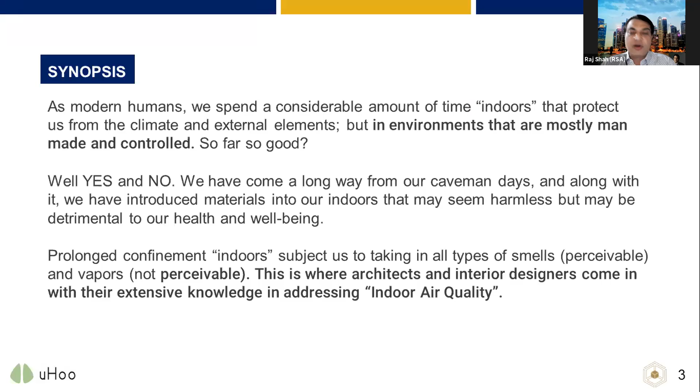So our prolonged confinement indoors subjects us to things like smells. So smells, I would put it as perceivable. And vapors are the non-perceivable. We can't really smell them. And so this is where architects and interior designers come in with their extensive knowledge. We are still learning and trying to address the indoor air quality question.

Okay, just a simple, just to start it off, definitions. I won't go into detail. What is an indoor? What is air? What is quality? What is design? I'll just move on.

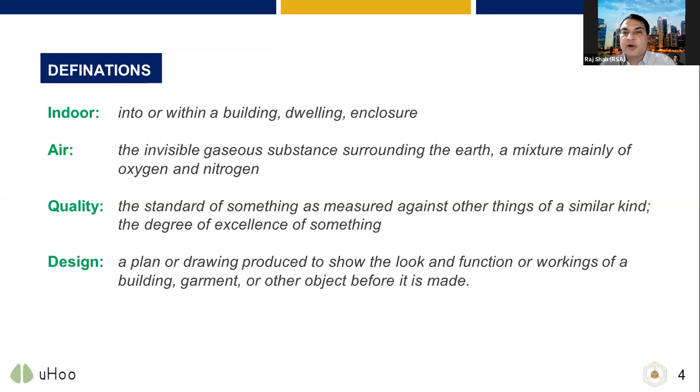Okay, this is all information that you can easily find if you Google, right? But these are what we deal with, day in, day out. Common indoor air pollutants are asbestos, which is already barred and forbidden in most interior spaces. There are a lot of old buildings that still have that, and it has to be really handled with extreme care, and only experts can touch it or remove it.

Biological pollutants, carbon monoxide, formaldehyde, and this is one of the key contributors to deteriorating indoor air quality, because formaldehyde is in a lot of materials that you wouldn't expect it to be in. All right, and it's also been industry-wide forbidden now or not allowed, especially for products that are rated green. But they are still present in certain products if you are unaware.

Lead, of course, that's another element that we used to use a lot in metals, but not now. Nitrogen dioxide, pesticides, radon, that's again with all the equipment that we are starting to use, and we don't realize that all of this is there.

Now, if you look at the picture on the right, the air quality at work, it's a little bit small, but it's not meant for us to read everything. In an indoor environment, all these things—from gray to blue to green to yellow—affect us in different ways.

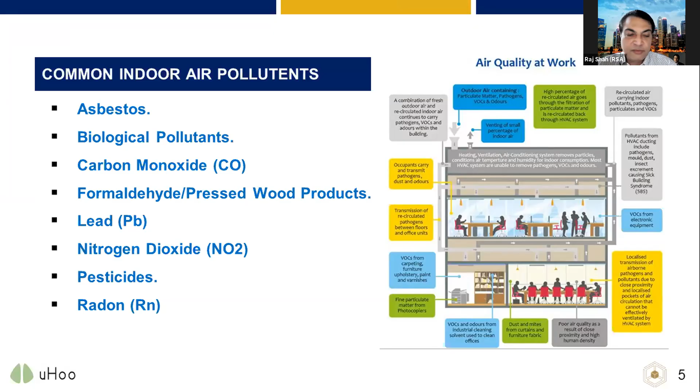But they're all contributing factors to the quality of air in any indoor environment. And I think the poll said it very clearly: allow natural air in, fresh air, better exchange. Some of these things we can control, but if you're in a commercial building, unless the building management or the building is designed to help trap these things ahead of time, there's not much else you can do. Good news is, we will be introducing certain new technology that will help you get ahead of the curve, for whatever you cannot control.

Okay, so two images. One is all the things poor indoor air quality affects—your health. I just mentioned headache, fatigue, eye and nose irritation. All these could be symptoms of a flu or a fever, but more likely, if you are staying too long in an indoor situation, you will experience these, and they could be a direct or indirect cause and effect of materials used indoors or the air quality indoors.

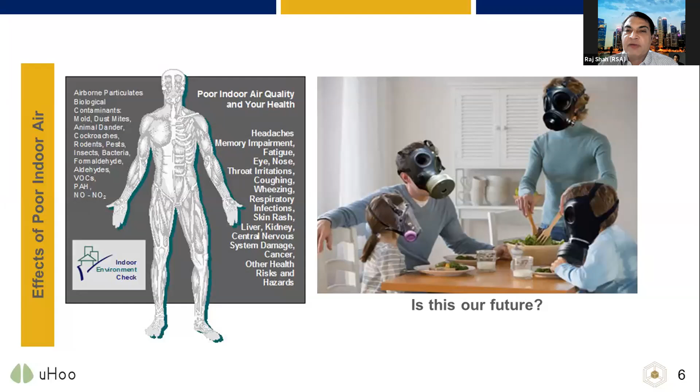So I'm asking this question: is this our future? COVID gave us a real scare—are we all going to end up wearing masks, even when we meet the family at home? I hope not, and I'm sure we won't. We only have to take baby steps and improve things that we can.

When we talk about indoor air quality and exposure to something, there are things we take into consideration, like the duration—how much time we spend indoors or exposed to a certain element or material. Exposure is the amount of time times the intensity of the vapors, how close you are, how defective an item is, if it already contains formaldehyde and so on. Believe me, you won't feel it, but you will experience it. Proximity—how close you are to this.

Most of us sit on chairs and furniture, and if these are made with materials—timber, plywood, laminates, fabrics—that contain glues, being in close contact with them is also a factor. Intervention: if we use mechanical or natural means to lessen or completely eradicate the offending vapors, can we do that? That's the thinking process. Common terms of reference: duration, exposure, proximity, intervention.

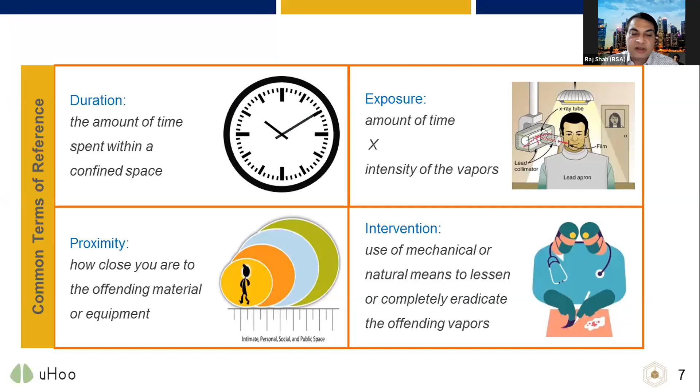What can we do? So, common sources of air or gases. Natural: every interior has a good amount of fresh air exchange via doors and windows, if you have that type of indoor-outdoor space. If you're in a tall commercial building, you tend not to have so much of this. Yes, you have some indoor landscaping, but not that much—it won't contribute much.

Materials: every material used in the fitting out of interior space, including plants, gives off a certain type of gas and vapor—some good, some bad. Imported: we often forget this, but the perfume we wear, the leather case we bring in, the exotic foods and snacks we bring into the office and share at the pantry—all of these, while not directly harmful, may contribute to the quality of the air within a space.

And of course, mechanical—the largest contributor to indoor air quality is your ACMV or HVAC system. That's one of the parts that we, as end users or designers, can sometimes deal with to a certain extent, but if the building is already designed in a particular way, we have to counter it rather than flow with it.

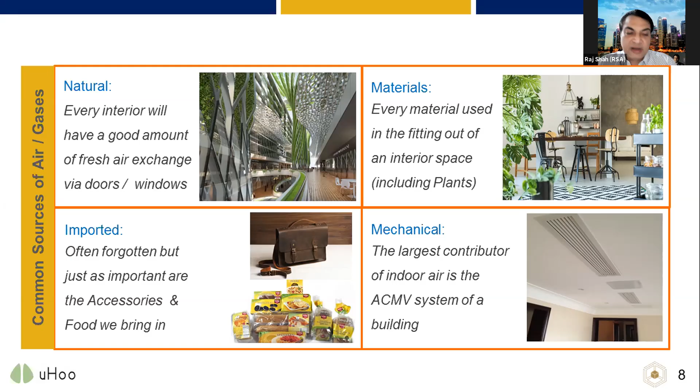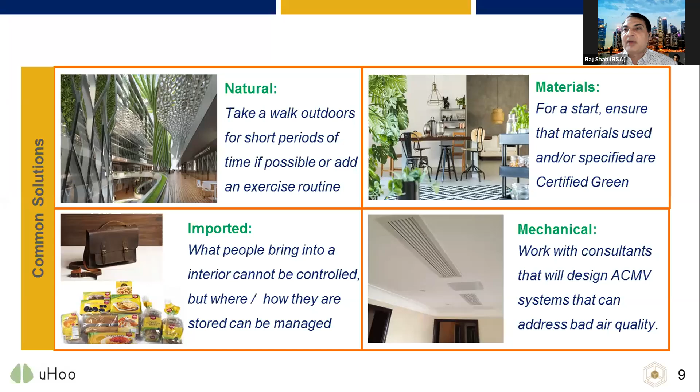Okay, so again, what are the common solutions? If it is natural, take a walk outdoors, go for short periods of time, and add an exercise routine. For materials, ensure that they are specified or certified green. Singapore has the green mark, the green label. Other countries may have other green certifications that we insist on when we specify a carpet or wallpaper. Of course, what people bring into the interior cannot be controlled, but if you contain it within a pantry area and not spread it all in the open office area, there is some level of control we can apply. Mechanical, again, working with consultants to design the system so that bad air quality is addressed upfront, rather than having to do a lot at the tail end.

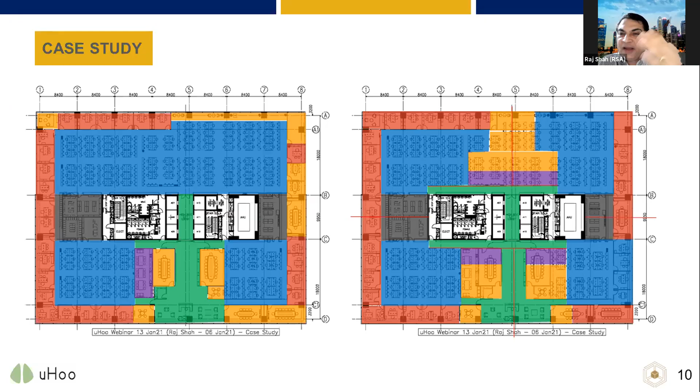But I guess later on we'll come back to that discussion with our audience. I just thought it was good while we have this visual representation here to ask those questions. Sure, we can come back to this slide later. And I just saw some questions as well asking about what do we do in this type of case and all that type of thing. We'll come back to that later.

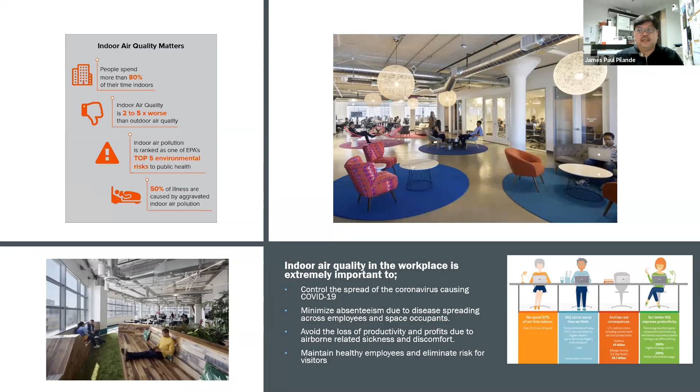Okay, so I'm looking at this visual.

Okay, so will our office of the future look like this? Personally, I don't see the future being working from home. It's just not suitable. One way or the other, we have to go back to the office.

Therefore, now we are aware of potential threats of airborne pathogens. We have to be conscious about the air we breathe. In the past, immediately after the pandemic, when people started going back to the office, this is what most designers were proposing.

Plexiglass barriers to block direct contact of aerosolized projectiles. For me, it's ridiculous. It's ineffective and dangerous. I think there are better ways of maintaining good indoor air quality through the HVAC system, like adding more frequent fresh air exchange rates into the indoor space to minimize the spread of airborne pathogens.

Moving forward, organizations like in Singapore, we have the SIDS, the Society of Interior Designers Singapore. There's also architectural organizations like UAP, United Architects of the Philippines, Singapore. They've been touching this topic quite frequently already, because we have to prepare for the post-COVID new normal. So their policies, they're enacting new policies after the pandemic.

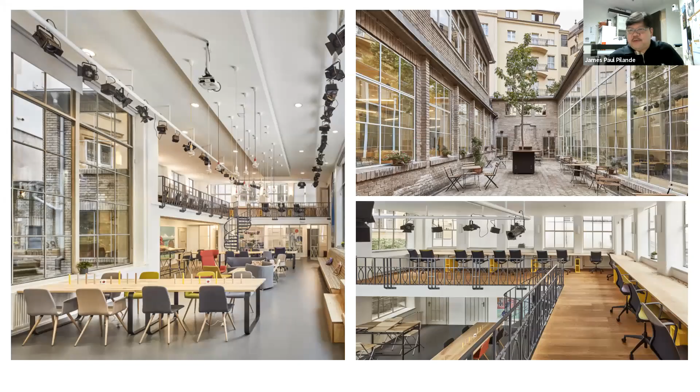So basically what we need to do is like this - okay, you can see there's quite a number of chairs, but try to eliminate the chairs. There's wide open spaces, big open spaces. You can space out people more, and then it's double volume, meaning your air can circulate, right? It's encouraging social distancing.

And then I think, for Singapore, we might not really be able to do this a lot, but I know we have viewers from Europe and from America. I think we can also encourage opening up spaces outdoors or office outdoors.

You see what you can see here. For me, the best way to fight it is through outdoors—create more outdoor air. So I encourage, if there's a space or opportunity to do outdoors, like verandas or open spaces in your building, try to get that space. You can encourage people to work outdoors, and that way you can already prevent the spread of the virus. This is an example I can show you.

In my presentation, I wanted to go more in depth into the visuals, because a picture speaks a thousand words. I'm a very visual person, that's why I wanted to show you more examples of how it can look, or the best way to tackle these issues for indoor air quality in the workplace. Currently these are just a few, because by right each individual topic is a subject by itself, so I don't want to elaborate too much on each one—I just wanted to cite images and show major examples so you can relate to what I'm talking about.

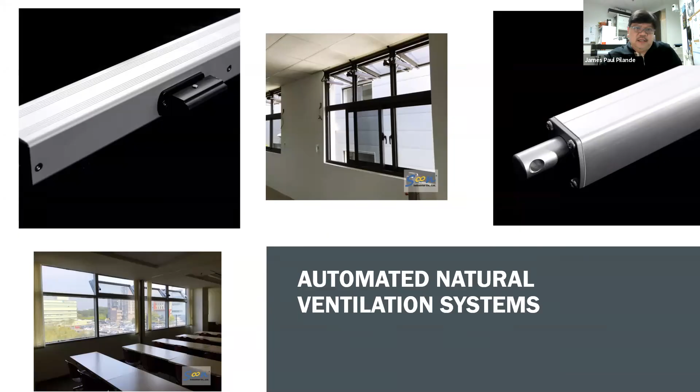Going back to the subject, this is one thing we designers can look at for our future projects. I know it will cost a bit more energy, because we might need to automatically turn off the aircon and open this for a few minutes, then once it goes off, the aircon turns on again. You can do that. There's a lot of ways to play with the uHoo app, so you can do all of these time-based trigger events.

The next one is the UV-GI air disinfection device, which I am involved in. It's the Lumenaire, from Lumenaire Singapore. So what is the UV-GI air disinfection device? This is the next generation air purifier equipped with UV-GI technology, not only to filter the virus, bacteria, and fungi, but to also kill them by disabling their DNA and RNA.

What is the difference between an air purifier and the Lumenaire? Air purifiers filter. The Lumenaire filters and disables and kills the DNA and RNA of the virus. How do they do it? UVGI is a product of strong UV dose, UV intensity, and time. The air passes through an enclosed chamber and stays there for about 1 second. That exposure time while the virus is in the chamber will kill the virus, disabling the DNA and RNA of the virus.

If you notice, why is the form factor of the Lumenaire longish? It's very long, 1.2 meters. Why 1.2 meters? It's because we need the length of exposure time to disable the virus. It takes 0.6 seconds to kill a coronavirus, according to CDC.

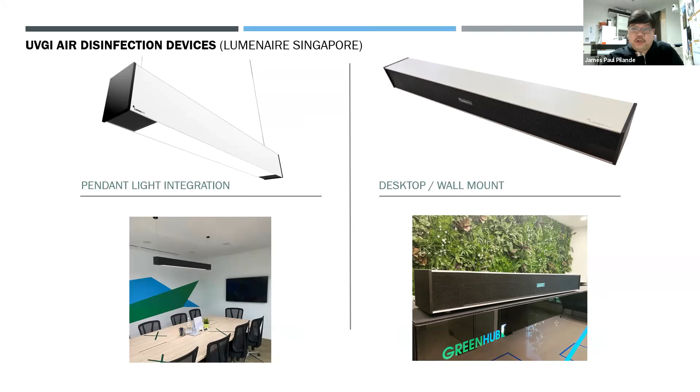Let's go to the next one, which is the simplified enterprise cloud solutions, using the Lumenaire and the uHoo. In the past, you had to go through the BMS, which has very, very expensive software just to monitor the air and trigger events. It will cost you a bomb, it will be very expensive.

But imagine if you just use a uHoo. A uHoo can trigger, like what I showed you just now, window actuators to open when you set a certain mark that it needs to open—like for CO2, when it reaches 2000, it will open, and then close after 5 to 10 minutes.

And then, of course, using the Lumenaire also—as you can see based on the visuals, it's an enterprise cloud solution, meaning it can be hooked into different smart devices. Currently, I use this quite frequently: the uHoo is connected to all the devices, and if the virus index—because the uHoo has a virus index monitor—reaches 4 or 5, it can trigger all the events, all the Lumenaires will turn on, and once it goes back to 3 or 2, it can switch off.